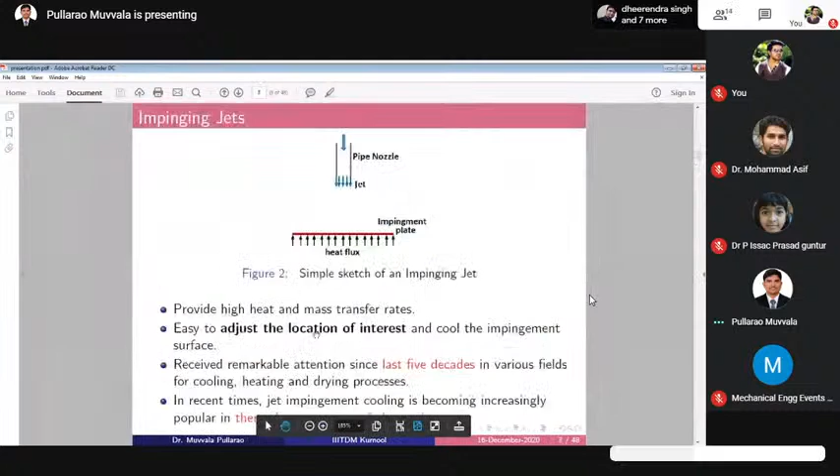I think this is the last session of this short-term training program. So the topic for today's session is impinging jets for thermal management. We'll discuss whether impinging jets can be used for a particular field or all the fields. Myself, Dr. Pullarao, I'm working as assistant professor at IIITDM Kurnool. Regarding the remaining details, Kondareddy sir might have already given you. So let us go to details about today's topic.

The presentation is oriented mainly towards my PhD topic. I have not chosen a different topic; whatever discussion I'm going to take part in here is entirely from my PhD study. The outline of the presentation is introduction, followed by review of literature, research outline, experimental details, and experimental studies conducted. My PhD study was entirely on experiments, so I'll take you through the experimental part details, how the experimental setup was built, and what different studies we conducted.

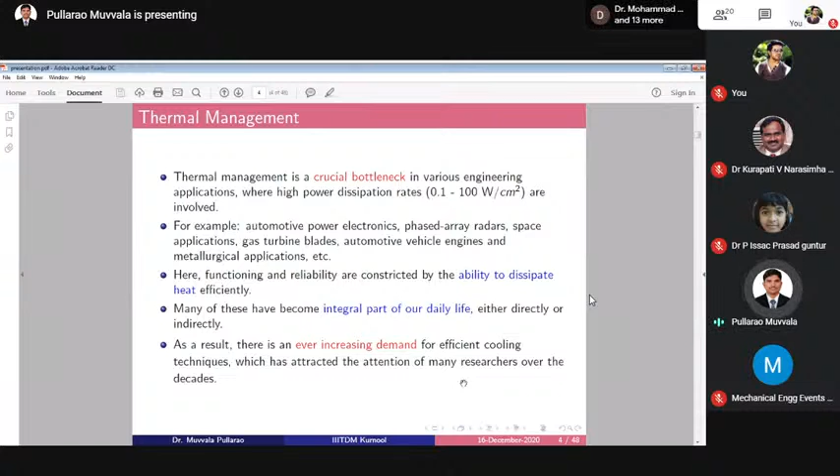If you come to different cooling techniques or thermal management techniques, thermal management is not confined only to cooling. Sometimes it can be for heating applications also. Let us confine our discussion to cooling techniques: active cooling and passive cooling. So what is meant by active cooling?

If you take a desktop computer, the CPU is there, and a fan will be present. The purpose of the fan is to cool the processor or other heat generating elements. So here the cooling is done by a fan, which has to run, meaning we supply some electricity for that. In active cooling technique, the cooling medium is supplied with the help of some external mechanism, for example a compressor, blower, or fan. These are required for supplying the working fluid to cool the hot object.

Some examples of active cooling technique: forced convection with air or liquid. In forced convection, air is sent with a fan or blower. Impinging air jet or liquid jet - this is what we are going to focus on now, impinging air jet, which also requires an external agency for sending the air. Other examples are spray cooling, thermoelectric cooling, and refrigeration systems. These are all active cooling techniques, where cooling is provided with the help of some external mechanism.

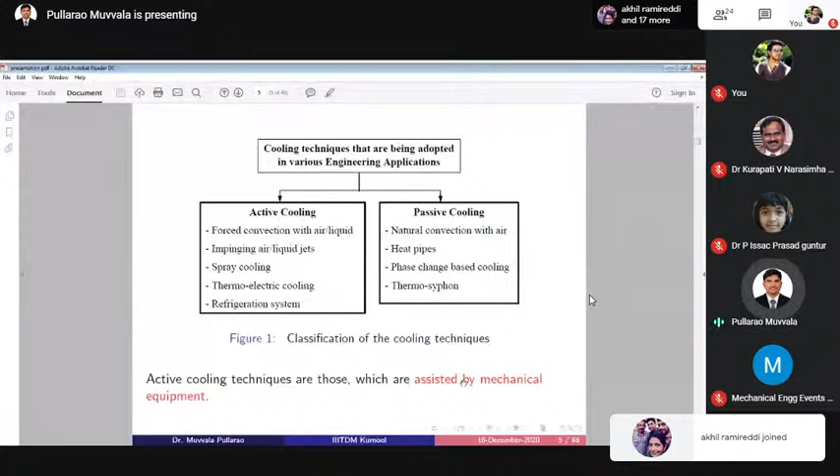If you see passive cooling: natural convection with air - here we will not supply any external power for running this device. Also heat pipe, phase change based cooling, thermosiphon. I think a few of these techniques were covered in the previous lectures, like phase change based cooling and heat pipes. So let us not go into much detail about that.

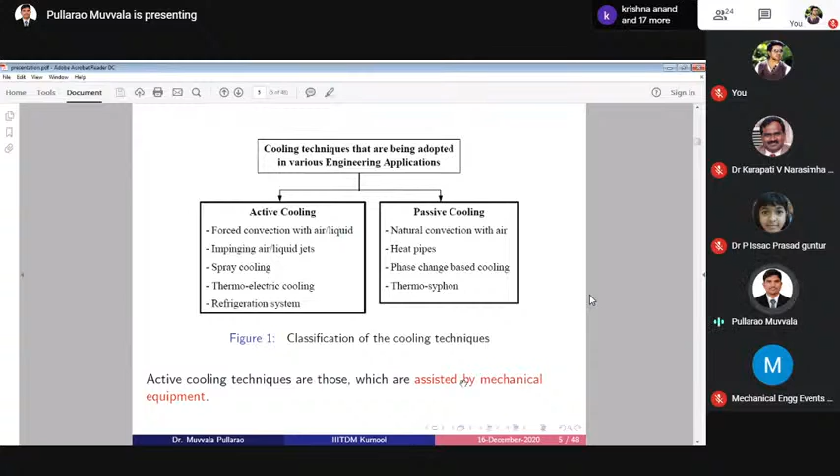Now I am focusing my attention towards impinging jet, and I am confining to only air jet, though jet can be a liquid jet also. Let us see what is meant by impinging jet: a jet is a stream of fluid issued from a nozzle with high velocity. In general, nozzle means a small cross section area. Whenever fluid is coming through a small cross section area, take the continuity equation, A1V1 equal to constant - if area becomes small, velocity will become higher. So by reducing the area, I am able to increase the velocity. That is the motto of a jet: a stream of fluid issued from a nozzle with high velocity.

Based on the relative direction of the jet with respect to the object of interest - so my jet will be there, I want to cool an object - how they are oriented with respect to each other matters.

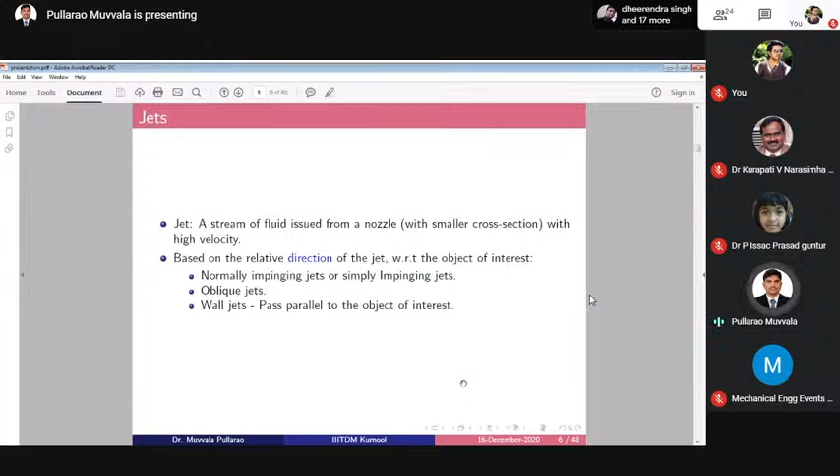We are classifying it as normally impinging jet or impinging jets - nothing but they are perpendicular to each other. Oblique jet: instead of having 90 degrees, some other angle, maybe 30 degrees or 50 degrees or 60 degrees. Wall jet means passing parallel to the object of interest, so both will be parallel to each other, with 0 degrees between them. So if it is 90 degrees, it is normal impinging jet. If it is parallel, it is called wall jet. If it is between 0 to 90, some other angle, it is called oblique jet.

So impinging jet, as I explained previously - just you see there is a red plate. That is the plate I want to cool. It is getting heated by supplying some heat flux. So there is a jet coming from the pipe nozzle. Nozzle, I told, jet will be coming out of the nozzle. Nozzle can be some orifice type nozzle or some pipe nozzle or some other nozzle - different types of nozzles are there. So I have taken the example of some pipe nozzle. Simple thing, just a small pipe is there, from that air is coming - that is a pipe nozzle.

So the jet is coming in vertical direction, and the impingement plate is in horizontal direction. You observe it is 90 degrees, therefore it is called impinging jet. So what are the features of it? This impinging jet provides high heat and mass transfer rates.

So this fact I am not just telling - previously so many researchers have identified and explored and listed this high heat and mass transfer rate, and easy adjustment of the location of interest to cool the impingement surface. For example, I am having an impingement plate, a bigger impingement plate, and my jet has a smaller cross section. The entire plate may not be subjected to the same temperature - a particular location may be at higher temperature, another location at lower temperature. So the advantage with this is I can orient my jet wherever the hot spots are.

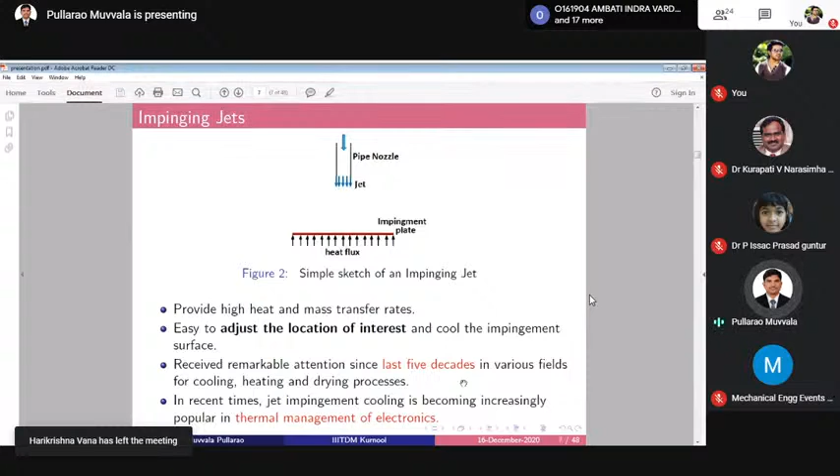There has been remarkable attention over the last 5 decades in various fields for cooling, heating and drying processes. So these jets are not only used for cooling purposes, they can be used for heating purposes and for some drying applications. One more point to keep in mind: over the last 5 decades, impinging jets are not a new field - the concept has been there for a long time. What we are doing nowadays is changing the application in which the impinging jet can be used. So this is not a new field, impinging jets are not new - we are just changing the application.

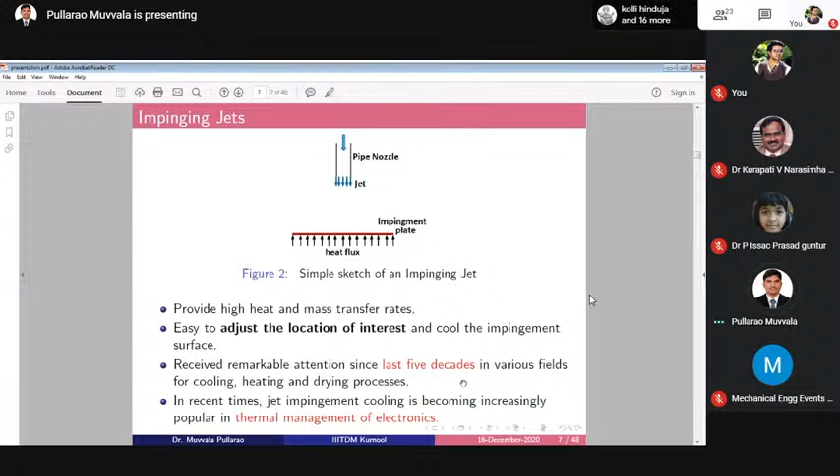In recent times, jet impingement cooling is becoming increasingly popular in thermal management of electronics. In the last 10-20 years, these impinging jets are widely used in thermal management of electronics. Earlier also it was used, but in different fields. So just observe the different fields in which these impinging jets are used - for cooling application, heating application, drying application - gas turbine blade cooling, electrical equipment cooling or electronic equipment cooling.

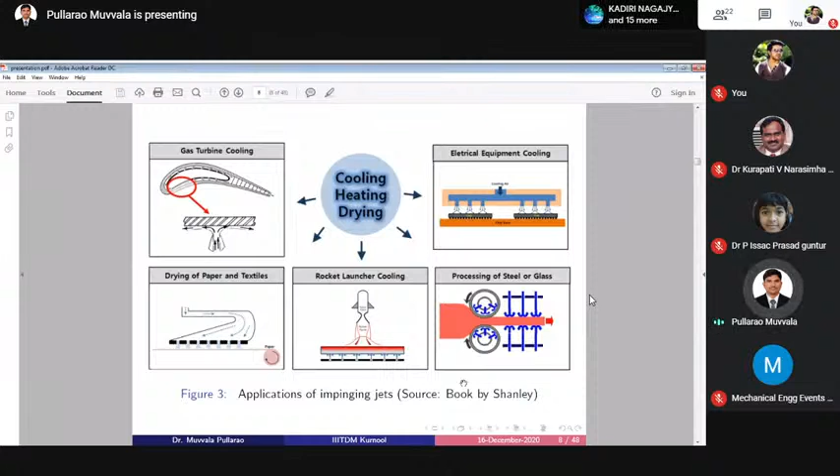So let us see the structure, the physics associated with these impinging jets, before going into its application part. I have taken a pipe nozzle having a diameter d. So the fluid comes out of the jet, comes out of the pipe with velocity v.

You see different regions demarked in the figure: free jet region, stagnation region, wall jet region. Pipe nozzle is there, there is an impingement surface. In the free jet region, the influence of this impingement plate is not seen, so therefore it is called free jet region.

So the jet traveling after a certain distance is going to hit the impingement plate. The region under the direct influence of the jet is called stagnation region. After hitting the plate in the stagnation region, the jet hits perpendicularly or normally. After hitting the surface, it moves parallel to the surface, then it becomes wall jet.

Once the fluid is flowing over the plate parallelly, boundary layer formation will occur, which we can see on the left hand side. So boundary layer growth will be there. That is the impinging jet physics: free jet region, stagnation region, wall jet region.

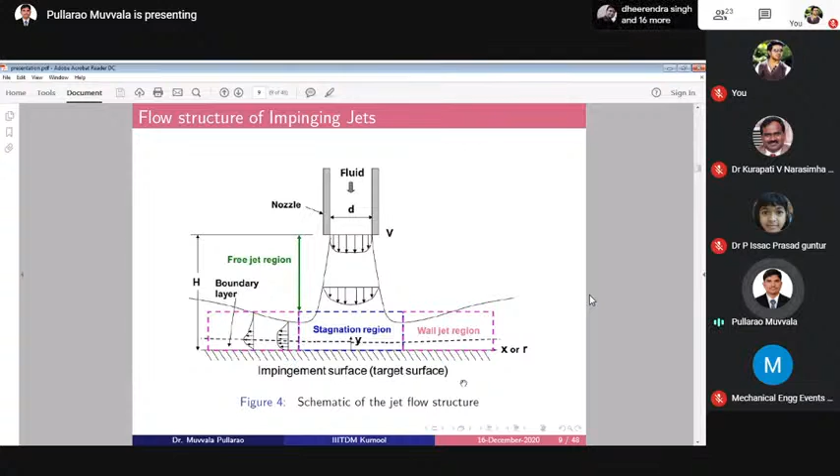Let us go into a little more detail about this free jet region, the flow region in the free jet region. The nozzle has a diameter of d or w. As the jet is moving longitudinally into the surrounding surface, if you observe, laterally its diameter is increasing.

So there is a lateral distribution as it is moving longitudinally; laterally also there will be some spread of the jet. Different regions are there: potential core region, developing zone, fully developed zone. You may have come across this in laminar flow through pipes, where also this type of region exists, though it's somewhat different.

But here, in this potential core region, there is a cone where the velocities are equal to the velocity at the nozzle exit. As you move away from the potential core region in the lateral direction, the velocities will be lesser than in the potential core region. Apart from that, as the jet moves forward,

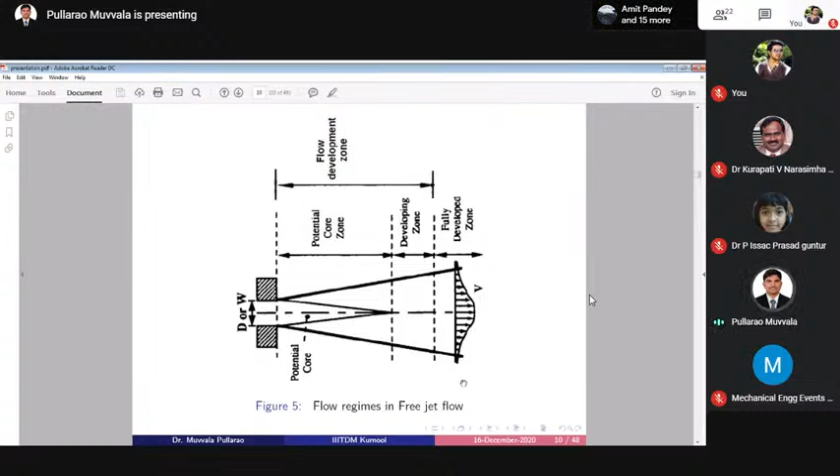the lateral spread of the jet is increasing, meaning the area of the jet spread in the lateral direction is increasing. So up to a certain distance, the potential core region exists. After that, a transition region called the developing zone occurs, followed by the fully developed zone. In the fully developed zone, the velocity profile is entirely different, but the profile remains the same as the jet moves in the forward direction.

Coming to the literature part, any research requires literature review; without it, you can't become a good researcher. The purpose of doing a literature review is, first, to know what people have already done. If people have already done it, what is the need to do the same thing again, to reinvent the wheel? So the motto of doing literature review is first to understand what previous researchers have already done, and second, how they have achieved a few things.

For example, some people might have done computational studies, some analytical studies, some experimental studies. We can understand how a problem can be tackled and what different methodologies can be adopted.

Next, we have to find some gaps. Everybody cannot do everything, so there will be some gaps, and we have to identify those gaps. Based on a thorough literature review, we identify the gaps and accordingly plan our research topic. That is why a thorough review of literature is important.

So let us see some literature. The papers I am going to explain are not the only ones I have read. There are hundreds of papers we have gone through as part of PhD work, but I am only providing you a few papers.

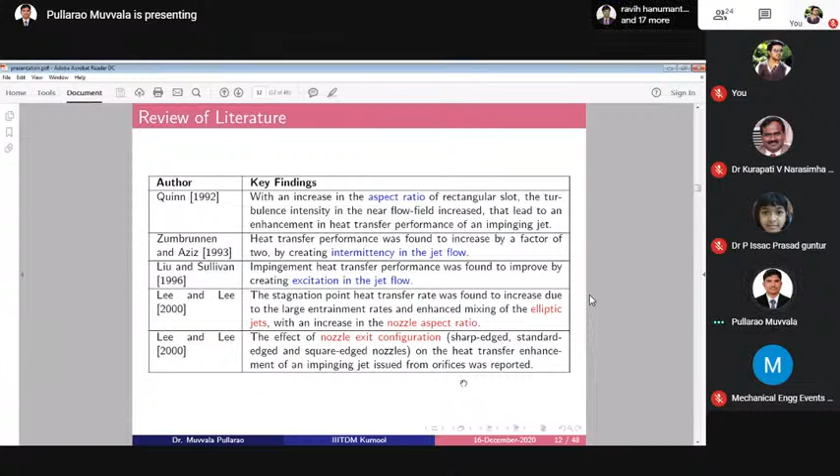Again, Lee et al. in 2004 varied the nozzle diameter and observed how the heat transfer performance was affected.

Next, confined and unconfined jets. Depending upon the type of jet, we can have a confined jet or an unconfined jet. That is one variation of the type of jets.

Another thing is unsteadiness in the jet flow. Instead of having a steady flow, it is like having a triangular profile, rectangular profile, or a wavy kind of profile. By creating unsteadiness in the jet flow, studies were conducted and heat transfer performance was observed to improve.

In 2010, studies were conducted by varying the inlet geometry and aspect ratio. Inlet geometry means whether it is a rectangular jet, square jet, circular jet, or elliptical jet. These studies were conducted to observe which one performs better.

The next study involved piezoelectrically driven synthetic jets compared with steady jets. So different variations of jets were used, and the list goes on.

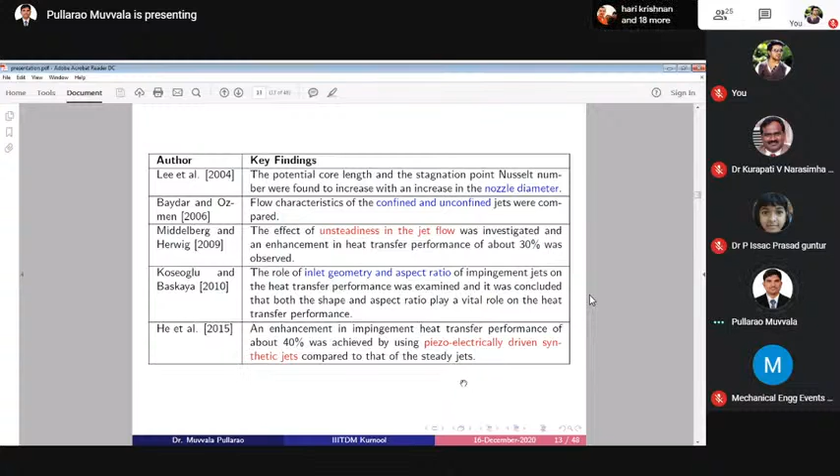Various flow control techniques have been employed, such as creating excitation in the flow, creating unsteadiness in the flow, varying the shape of the nozzle, or changing the flow pattern. These are examples of flow control, and heat transfer studies were conducted using them.

In some studies, heat transfer performance was reduced; in some studies, it was improved. Whichever gave better performance, researchers focused more on that heat transfer enhancement phenomena. Keep in mind that research should not always give positive results. Sometimes negative results are given too. You anticipate that heat transfer enhancement will be there, but you might get heat transfer reduction instead. That is also research.

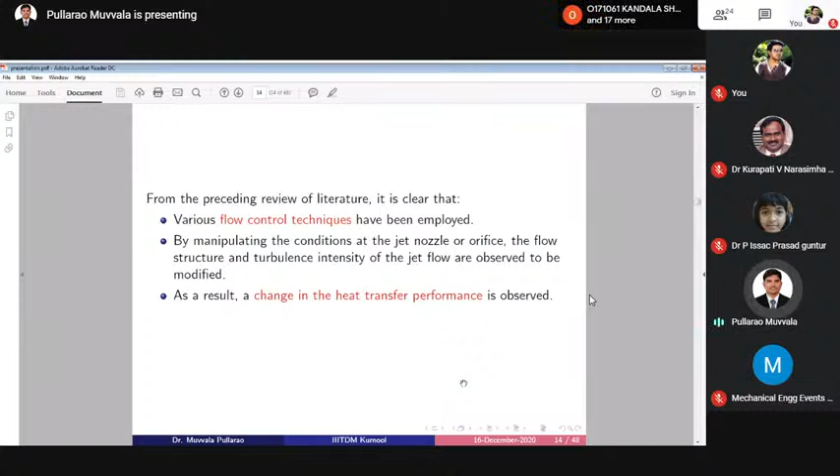You should not only report positive outcomes. It is not like you should always tell advantages; there are situations where you should tell disadvantages also. Some studies gave heat transfer enhancement, some gave poor heat transfer. Those heat transfer enhancement aspects will be discussed further.

Apart from that, another set of studies used perforated plates instead of a normal nozzle. Instead of a plain nozzle, they used a perforation kind of arrangement, like a sieve with many holes. Such types of nozzles were used.

Another approach is delta tabs at the nozzle exit. Instead of a plain or circular nozzle, tabs were placed to create disturbances at the nozzle exit. Additionally, twisted tapes were inserted inside the nozzle.

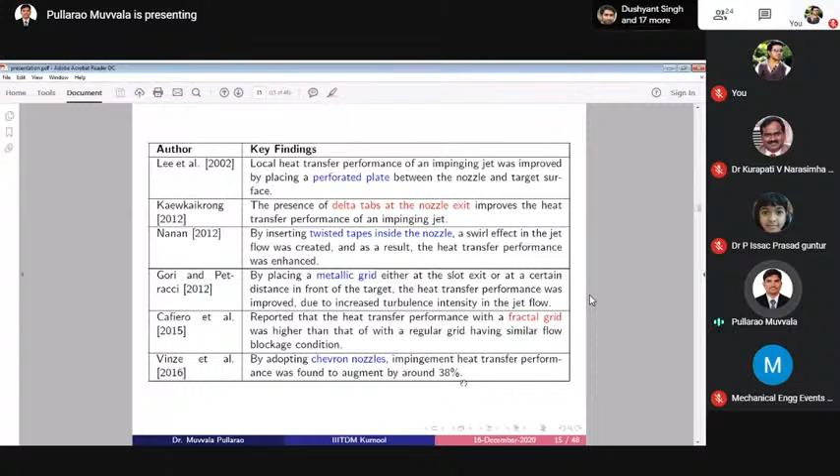Gori and Petracci used a metallic grid. In 2015, some studies used a fractal grid, and in 2016, a chevron nozzle was used. So for a fixed shape, for example circular, by creating some obstruction in the flow using a perforation plate, various modifications were studied.

So many studies have been conducted to enhance heat transfer performance by adopting flow blockage techniques such as installing wire screen, grid, fractal grid, etc. within the nozzle, creating flow disturbance or blockage. They might have used meshes, fractal grids, or delta tabs. By adopting these different flow blockage techniques, studies observed the heat transfer performance.

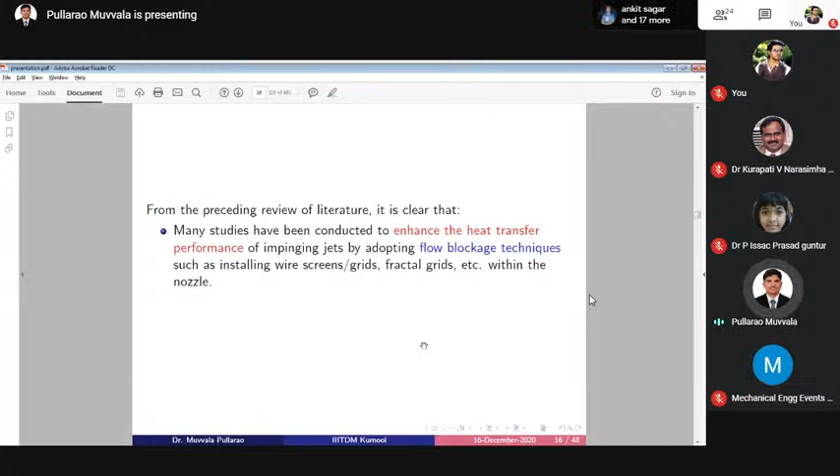So apart from that, till now we discussed how changing the flow control means varying the profile of the nozzle. Another thing is flow blockage. In flow blockage, if I block the flow, how was the performance there.

Apart from that, we have concentrated at the jet side. So what about the impingement side? If we create some disturbance at the impingement side, what will happen?

In the year 1992, a study was conducted using millimeter scale fins on the impingement surface. There is an impingement surface and a nozzle. Till now we discussed the nozzle; now consider the impingement surface, where millimeter scale fins, not large scale fins, are used. They observed whether heat transfer performance improves, and it was observed to improve.

Again, some roughness on the impingement surface. If we create roughness on the surface, what will happen? Next, microstructure surface, not milliscale. Then, nanostructured surfaces.

In 1993, six different types of modified surfaces were used. Next, in 2002, Ekkad and Kontrovitz studied dimpled surfaces. So by varying the profile of the impingement surface, adopting fins, microstructures, nanostructures, roughness, or dimples, what happens to the heat transfer performance?

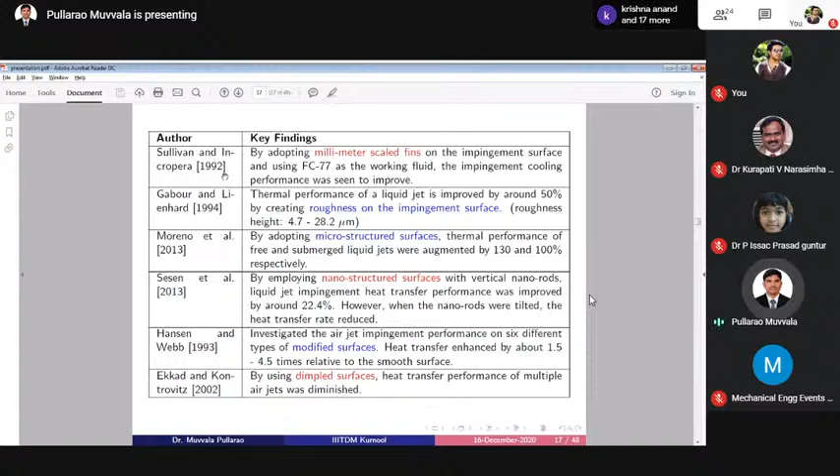So many studies have revealed that impingement heat transfer can be altered. It could be increased or decreased by adopting modified surfaces.

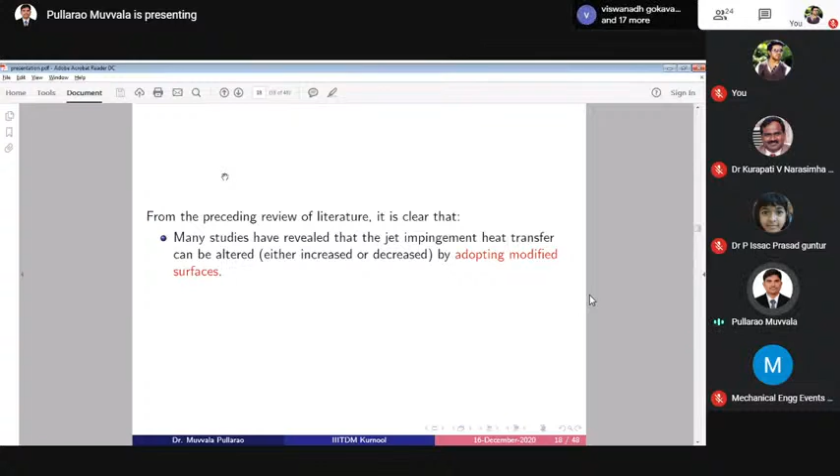With this background, I have formulated my research topic. The common feature is flow disturbance. If I create flow disturbance at the nozzle side or orifice side, or at the impingement side, I adopted rough surfaces and microfinned surfaces at the impingement side, and a distributed orifice fitted with wire mesh.

So what is a distributed orifice? We will see later. What is meant by wire mesh? We will see that later too. Finally, I compared these things: by creating flow disturbance at the orifice side or at the impingement side, how the heat transfer performance will be affected.

My focus is mainly towards enhancement in heat transfer. After conducting all these studies, we will list in which case heat transfer enhancement occurs and in which case heat transfer reduction occurs. We have to list out all those things, whichever is required. My motto is heat transfer enhancement, so we have to focus on those enhancement studies only.

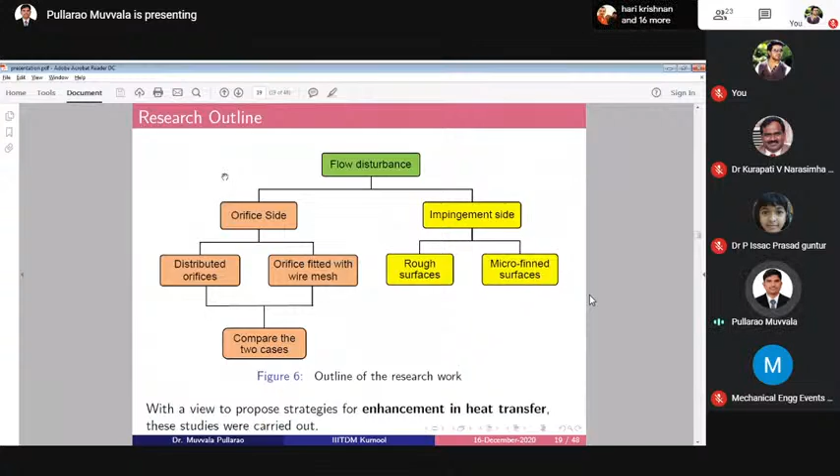So here I am using air, and the air has to flow. For that purpose, I should have some external mechanism — that is the air compressor used here.

For that, the second part is the filter regulator unit. For example, the surrounding air we take may have some dust and some water vapor that will condense.

Those things will be removed with the help of the filter regulator unit. Next comes the dehumidifier. If the filter regulator unit almost removes the water vapor, if any little bit of traces are left out, those will be removed with the help of the dehumidifier.

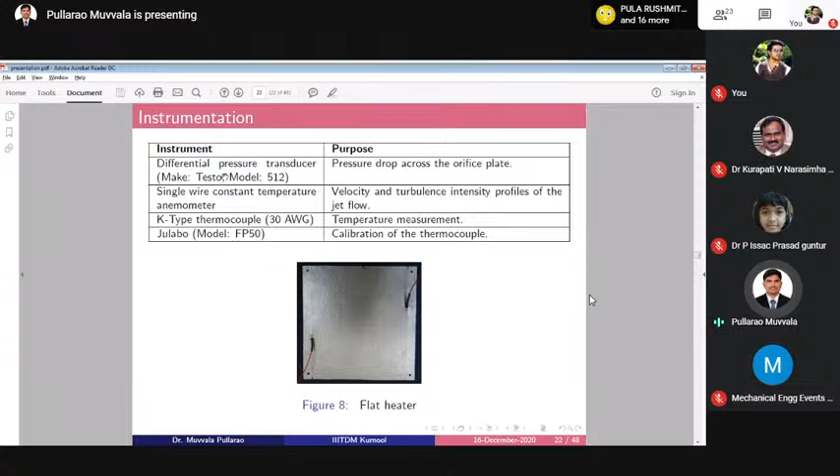Since we are conducting heat transfer studies, temperature has to be estimated. That is measured with a K-type thermocouple. Thermocouples come in 2 wires, which we join together to form a junction. After forming the junction, we should check how it is performing.

Any instrument we have to calibrate. Calibration is a must for any instrument. Calibration means checking with respect to a standard value. So for the thermocouples fabricated in the laboratory, we have to check whether they are giving correct readings or not.

For that purpose, a constant temperature bath is used, made by Julabo. That is used to calibrate the thermocouple.

The bottom one is a flat heater. The impingement plate will be heated by supplying some power through this flat heater. Inside it, there is a mica sheet with nichrome wire wound around it.

The two wires coming out are the plus and minus wires, connected to the power supply. Inside, the nichrome wire is there. By switching on the power supply, current flows through the nichrome wire, which gets heated. The heat passes through the mica sheet and is given to the impingement plate.

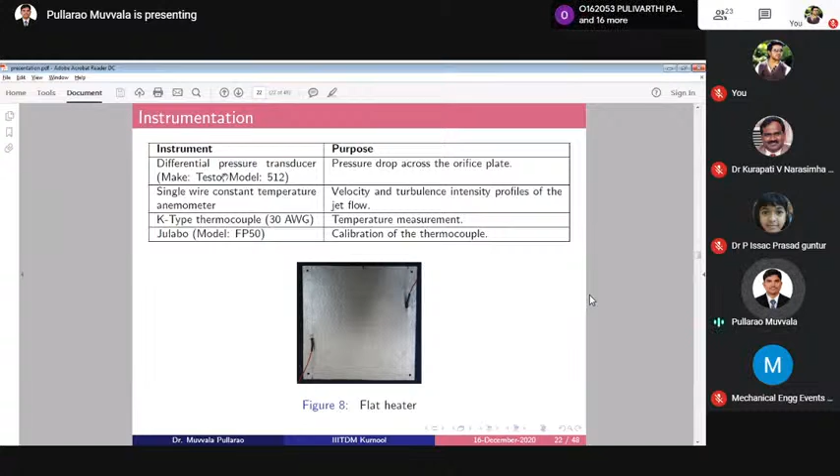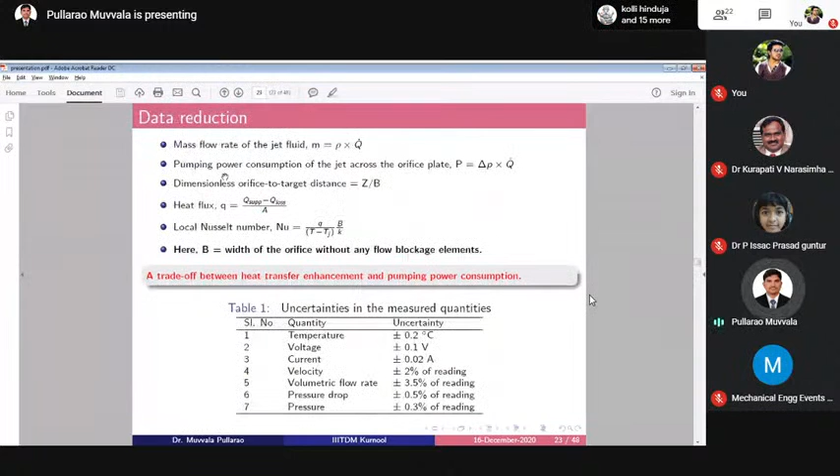Apart from this, what are the derived quantities? For example, heat transfer or Nusselt number. Those things are also prone to errors, those are derived quantity errors, so those things also we have to estimate. So now, validation of the experimental setup.

People may think only CFD studies should be validated. It is not correct. Even sometimes experimental setups also need to be validated. Since this is a setup built by me newly, I don't know how far I've constructed my setup properly. For that purpose, I should check whether my experimental setup is correct or not.

For that purpose, I have to check my experiments, compare the results with previously published results, and observe whether they are matching or not. If they are not matching, I should ensure that something is a mistake with respect to my fabrication. I have to introspect and plan my setup accordingly.

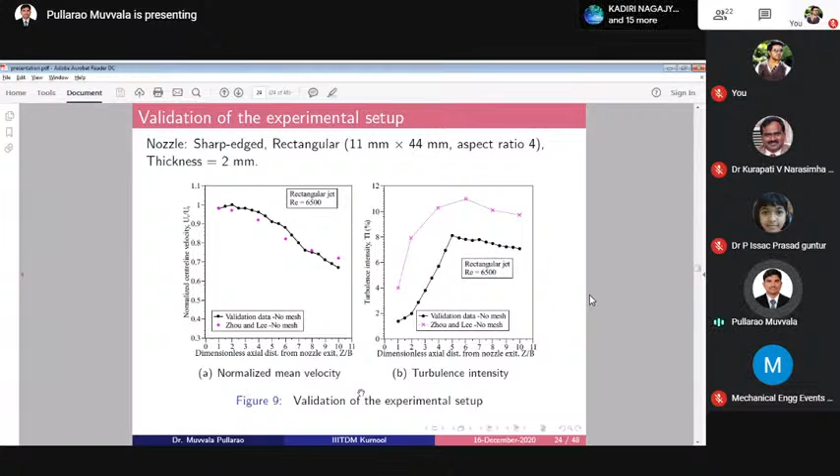So then I have started my experimental studies. I have conducted different types of studies. Let me start with study number 1.

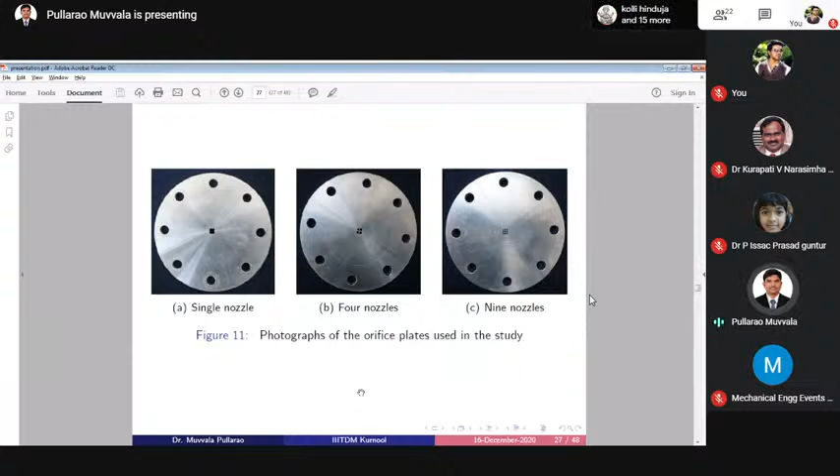We can even go for 4, 9, 16 orifices also. But the problem is one orifice width is 1 mm; going below that, fabrication becomes difficult. For computational studies we can go for maybe 0.5 mm also, but when doing experiments, there are so many complications with fabrication. Even for making a 1 mm square hole, we have to go for EDM techniques; if I go even below 0.5 mm, again we need sophisticated fabrication techniques. That's why I have confined it to only up to 1 mm.

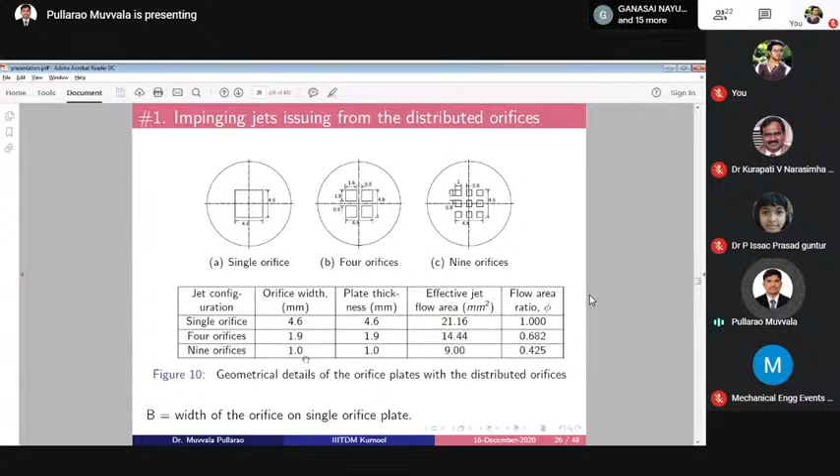So as part of this distributed orifice study, in study 1, we have a fixed mass flow rate condition. Whatever fluid flow I am sending, whether it is single orifice, 4 orifice, or 9 orifice, it is fixed. Then I observed what is happening to the velocity.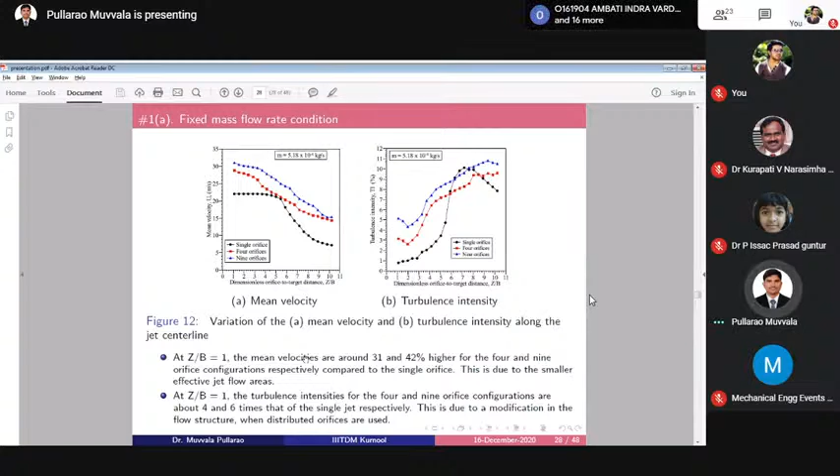Again, regarding how turbulent intensity is increased: earlier with a single orifice, the flow had to go through 1 passage. Now it has to go through 9 passages, so the flow has to distribute in 9 directions. Obviously there will be disturbance in the flow, and when disturbance is there, turbulent intensity will be increased. So these are the phenomena happening behind it: velocity is increasing, turbulent intensity is increasing.

So these are the advantages: velocity increases, turbulent intensity increases. Okay, good. But what happened to the pressure drop across the orifice plate?

I have put an orifice plate. If I take the single orifice scenario, what is the pressure drop across it? For multiple orifice, what is the pressure drop? Let us see the last one, 7.4 scenario: pressure drop is 41.5, 119.4, 226 Pascal. You see, it is almost 5 times — 41 and 226 is almost 5 times. Pressure drop has increased 5 times.

Correspondingly, the pumping power is also calculated. It is 26.4 into 10 power minus 3, that means 0.0264, and on the higher side it is 0.143 watt. So 0.143 watt is a very small value. Even though percentage-wise it may be 5 times higher, magnitude-wise it is very small. So whatever the pumping power consumption increase is, the value is only slightly more. So this can be okay, we can leave it.

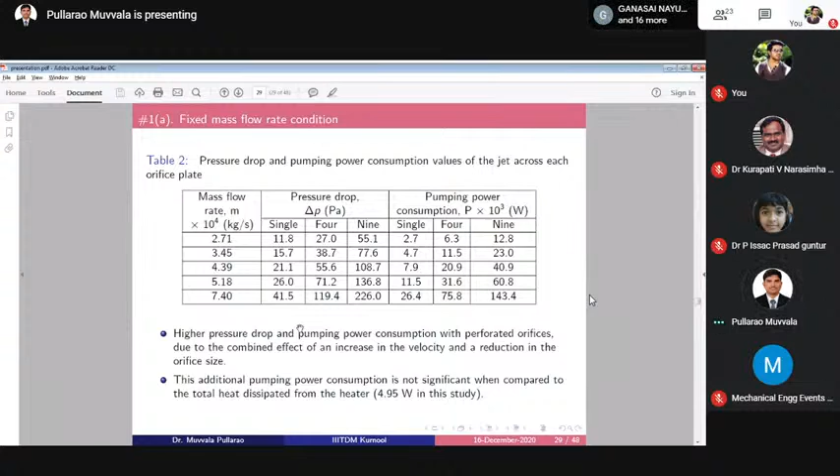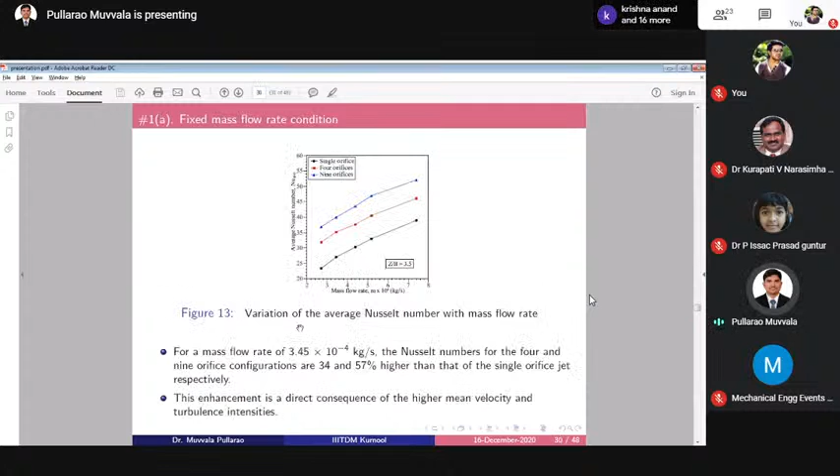What is the reason? We have already observed: mean velocity is increased, turbulent intensity is increasing. Whenever we report that heat transfer performance is improved, we should justify the reason. To justify that, we conducted fluid flow studies and turbulent intensity studies, and concluded that because of these reasons, heat transfer is increased. So because of adopting these multiple orifices, heat transfer performance is increased, while the pumping power consumption increase is limited and can be neglected.

Apart from that, that is one type of study in case one. Another study is with the same distributed orifices, but I want to fix my Nusselt number on the target plate. I have fixed the heat supply to the target plate and fixed my Nusselt number.

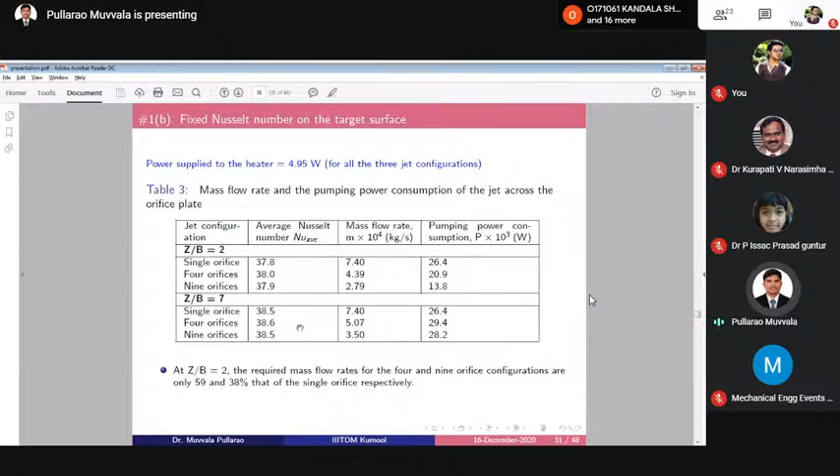For example, let us see Z by B equal to 7. Single orifice: my average Nusselt number is 38.5, 38.6, 38.5. To achieve the same Nusselt number, what fluid flow rate is required? For single orifice, the fluid flow required is 7.4 into 10 power minus 4 kg per second. For 9 orifice, it is 3.5 into 10 power minus 4 kg per second. So the amount of air required becomes 50% or 40% only.

Since it is air, it is freely available. But if I am using some other fluid, I should have extra fluid available. Apart from that, here I am also using a compressor, so I should use double — for example, comparing 3.5 and 7.4, with single orifice I have to handle double the amount of air flow rate. Then the power consumption of the compressor will also increase, and I should use larger capacity compressors. So these things also need to be considered.

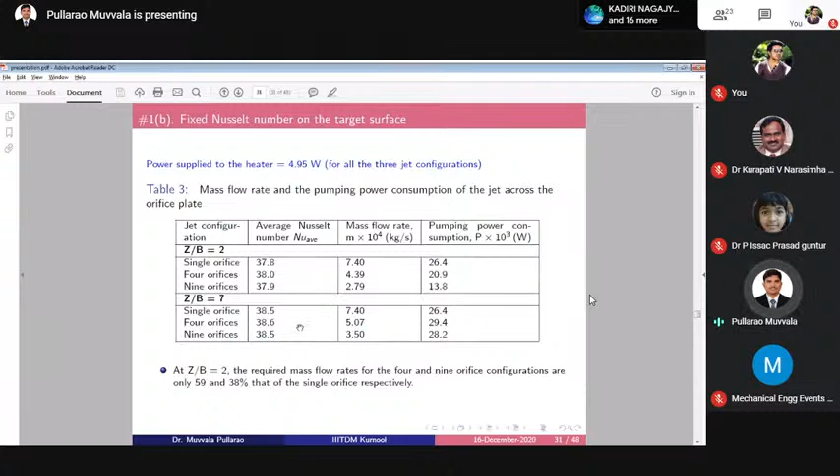If I take the 9 orifice scenario, with multiple orifices, the amount of fluid required is reduced, and the compressor size also gets reduced. This is also an advantage. So from these two studies we can conclude that if I fix the mass flow rate, Nusselt number can be increased, and if I fix the Nusselt number, the amount of fluid required will be reduced. These two are favorable scenarios for me.

So another scenario, impinging jets with nozzle having wire mesh at the exit. Just see the left hand side figure. If I place this type of orifice plate, the red portion is the wire mesh.

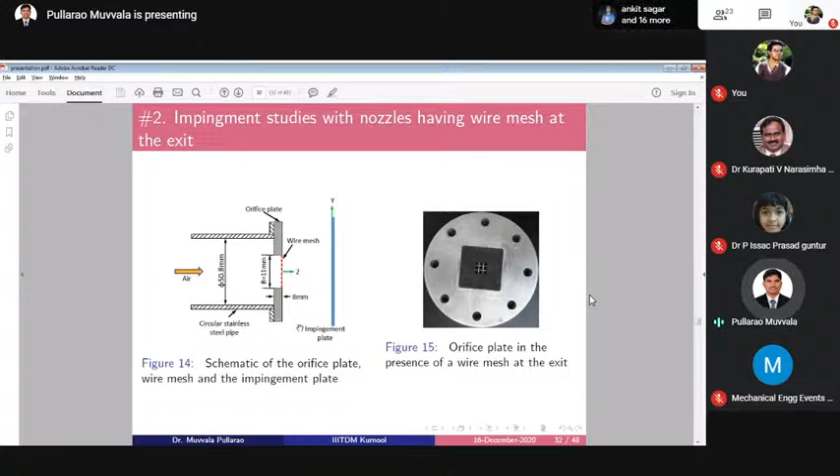Instead of having a plain simple nozzle, we are putting some wire screen meshes, just like mosquito or window meshes. Three different varieties of meshes were taken. If you observe, I have put some steel rule between mesh 11 and 13, you can see different numbers of wires are there. So the number of wires will vary, and the gap between two adjacent wires will also vary. These are the normally available wire meshes.

So again, we have measured the area based porosity. I have used 3 different types of wire mesh and one case without mesh, measured the area based porosity value, and conducted the studies.

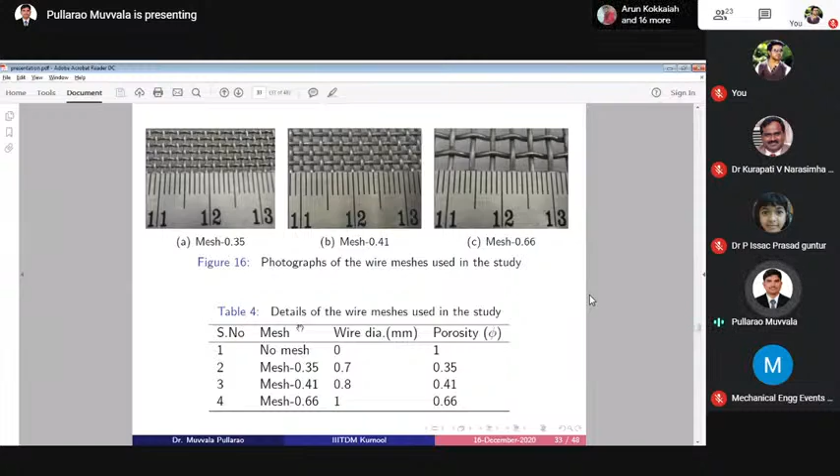So when the area porosity value is reduced, that means area is reduced for the jet flow. As a result, velocity increases, and turbulent intensity also increases. So these are the background phenomena - mean velocity is increasing, turbulent intensity is increasing.

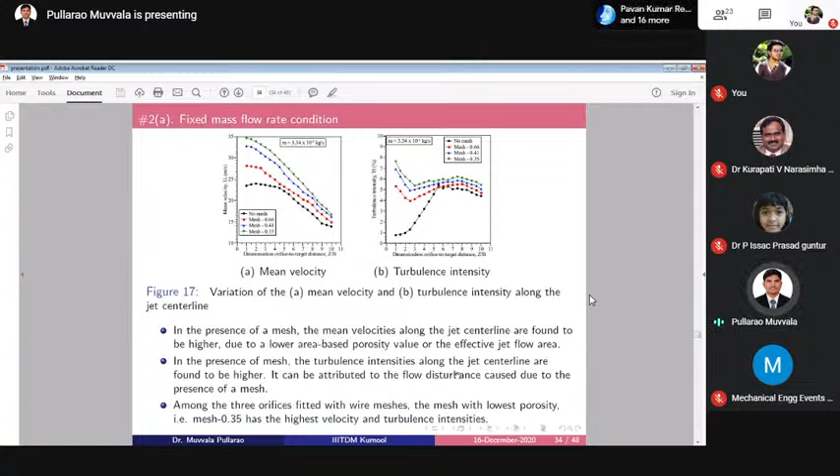Coming to pressure drop and power consumption, just see 4.82 into 10 power minus 3 scenario, 242, that is without mesh. With mesh 0.66, 431, 631, 784 - 242 and 784, almost 3 times it is there. Correspondingly the power consumption is 1.010, 3.274, around 2.274.

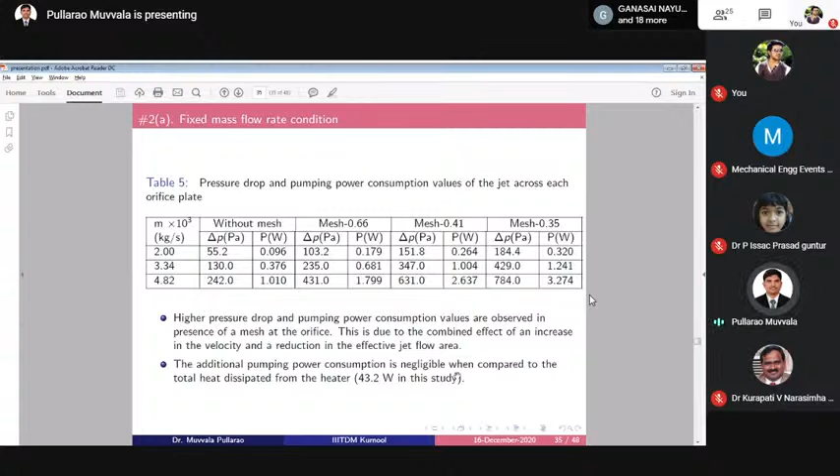In this study, the heat I am supplying is 43.2 watt. The power consumption with respect to this mesh is 1.01, 3.2, the difference is close to 2.2. 2.2 and 43.2 comes to around 5%, so some significant value is there. We should introspect this aspect. Previously the magnitude was very small so we did not concentrate much on power consumption, but here it is close to 5%, so we should introspect what is happening here. That phenomena we will see later.

So instead of presenting the result in a monotonic way, like whenever we present a paper, we should present the same result differently. Previously I told how I am comparing without mesh, single, and perforated. Now what I am taking is the ratio of with mesh divided by without mesh. Here I have drawn a horizontal line at 1. If you see the figure, all are above 1, meaning because of the mesh, the heat transfer performance is improved.

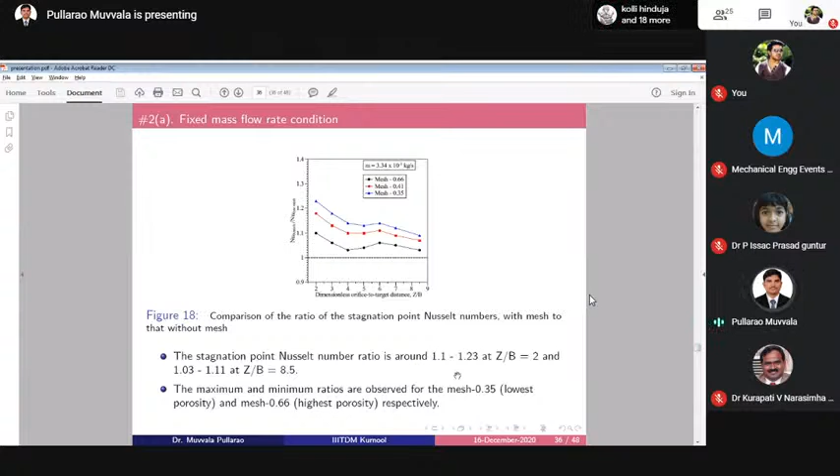That is how I presented the result differently compared to the previous scenario, with all values above 1. That blue one is mesh 0.35 - it has higher performance because it has higher velocity and turbulent intensity.

Coming to what I told about power consumption, that is a significant value - let us focus on power consumption and keep studies on that. So I have fixed the pumping power consumption at 0.376, or let's take 1.010. I want to maintain the pumping power across the orifice plate the same. Correspondingly, what is the required mass flow rate and what is the pressure drop? For the case of no mesh, it is 4.82 into 10 power minus 3. For the case of mesh 0.35, it is 3.10 into 10 power minus 3. So the mass flow rate is reduced.

So the amount of mass that is flowing is reduced. You see mean velocity and turbulent intensity values. The black portion is without mesh, and the remaining colors are with mesh.

If you observe at lower Z by B values, mean velocity is higher for mesh. But as you move away from the nozzle, Z by B value is increasing, and the part without mesh is having higher mean velocity. Even with respect to turbulent intensity, at lower Z by B values only, meshes are having higher turbulent intensities. At higher Z by B values, meshes are not having higher turbulent intensity.

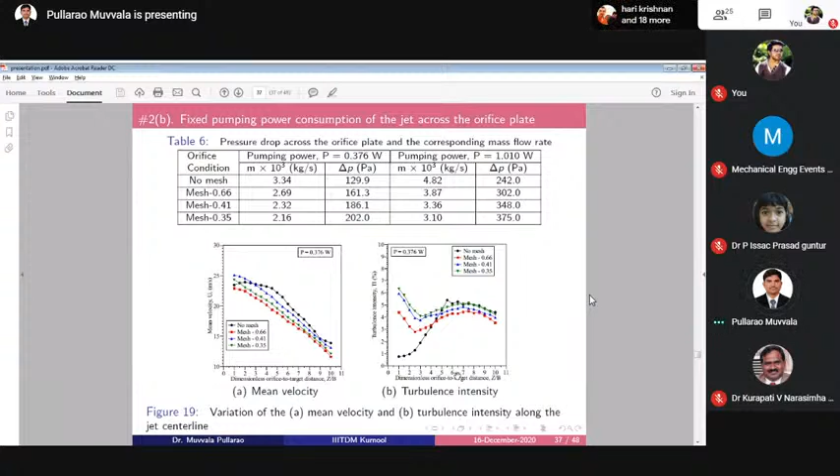So with this, what is the heat transfer performance? At lower Z by B values, we can see enhancement is more than 1. But at higher Z by B values, there is a reduction in heat transfer. So we should not go for such type of studies. Whenever our constraint is fixed pumping power consumption, I should use lower Z by B values only. If I go for higher Z by B values, it is not advantageous. That is what we have to conclude.

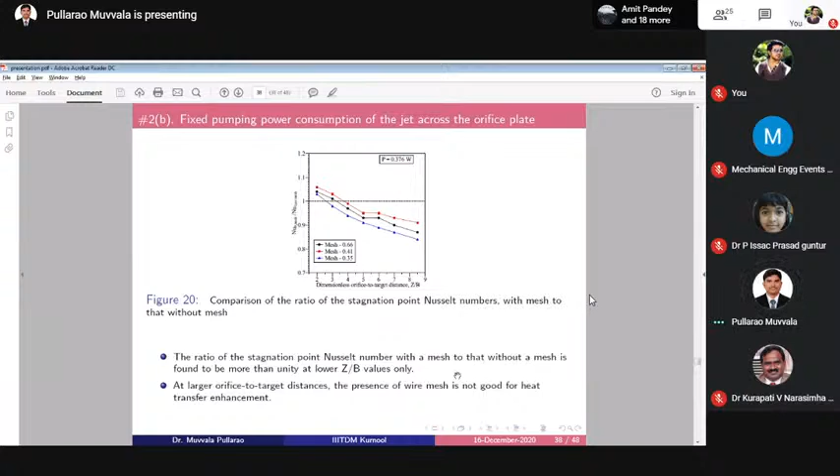So, effect of orifice blockage element on the performance. What are the studies previously we conducted: without any disturbance, with distributed orifice, with mesh. So these three we have taken and compared.

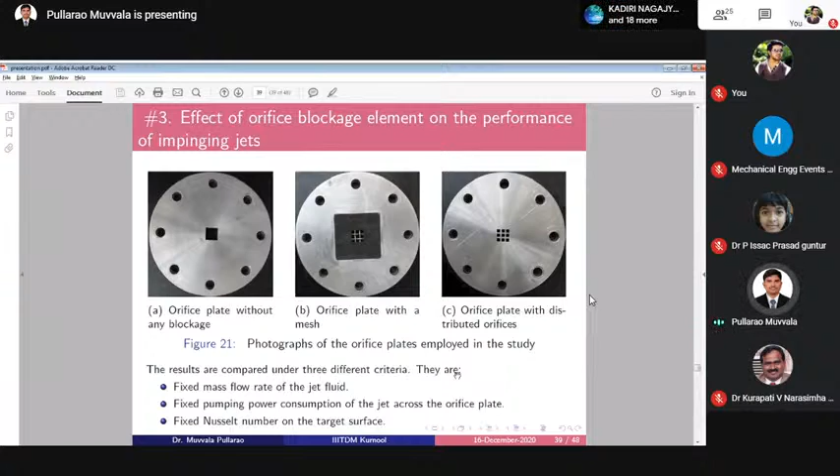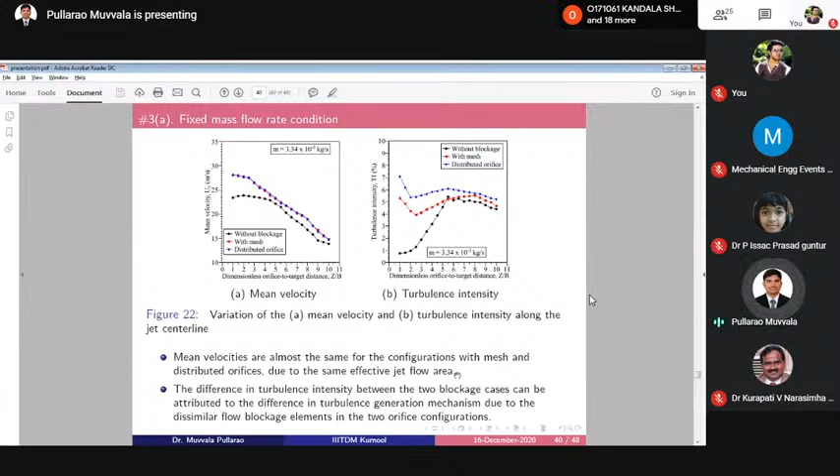By 3 different parameters: by fixing the mass flow rate, by fixing the pumping power consumption, or by fixing the Nusselt number. So by fixing the mass flow rate, the black one is without blockage or any disturbance, red one is with mesh, blue one is with the distributed orifice. You see velocity is more or less same, but turbulent intensity is higher for the distributed orifice.

So accordingly, come to figure 23, heat transfer performance is higher for the blue thing, that is the distributed orifice, because turbulent intensity is higher for this. That is the reason.

Another thing, when you see the pressure drop and pumping power consumption, without blockage it is 242, with blockage it is 431 and 491. So obviously with blockage pressure drop is higher, but when you compare mesh and distributed orifice, the pressure drop variation is little, some 10%, but heat transfer enhancement is more.

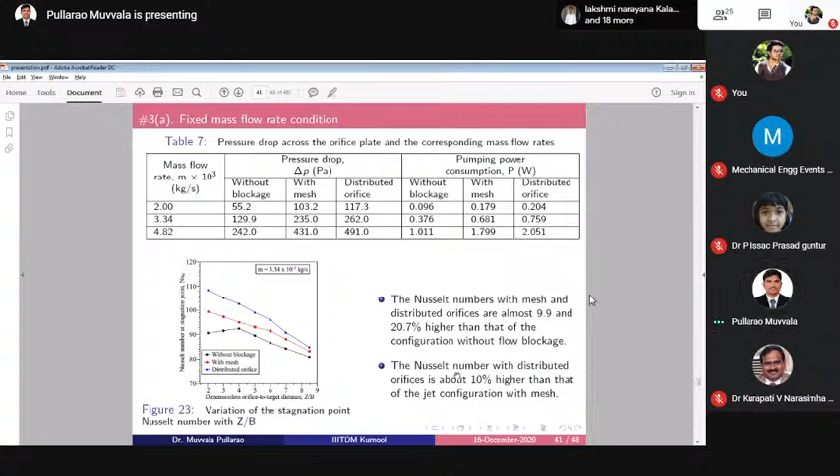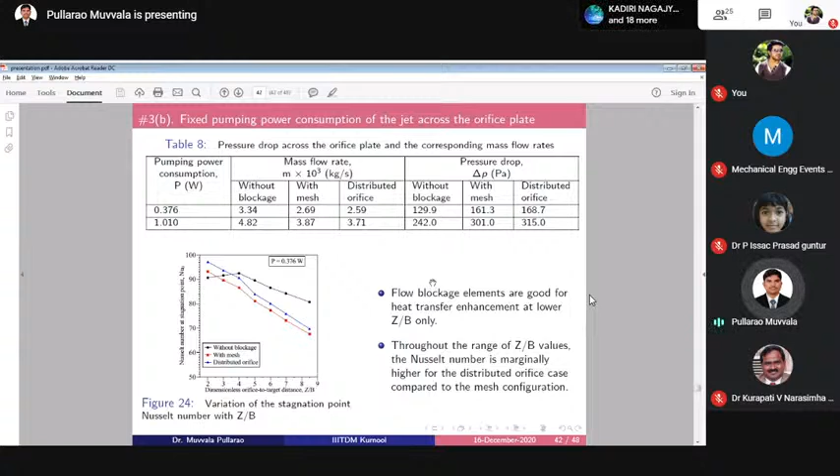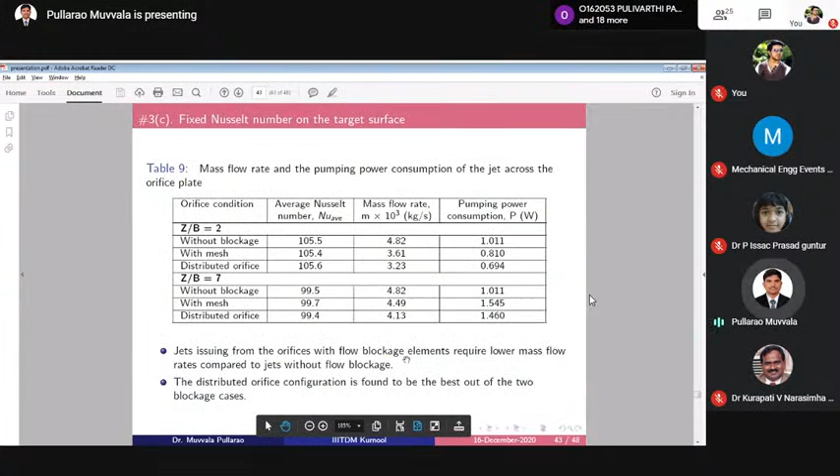Again by fixing the Nusselt number, we have conducted the studies. At Z by B equal to 2, without blockage the flow rate required is 4.82 into 10 power minus 3. With mesh it is 3.61 into 10 power minus 3. With distributed orifice it is 3.23 into 10 power minus 3. So because of adopting flow blockage techniques, if I want to keep fixed Nusselt number, the amount of airflow required is reduced. As a result, my compressor size also reduces. It is an advantage for me.

So throughout all these three studies we observed: flow blockage techniques in some cases are outperforming the without-blockage techniques. And when we compare mesh and distributed orifice, the distributed orifice performance is better than the mesh scenario. The physics associated with that is also described.

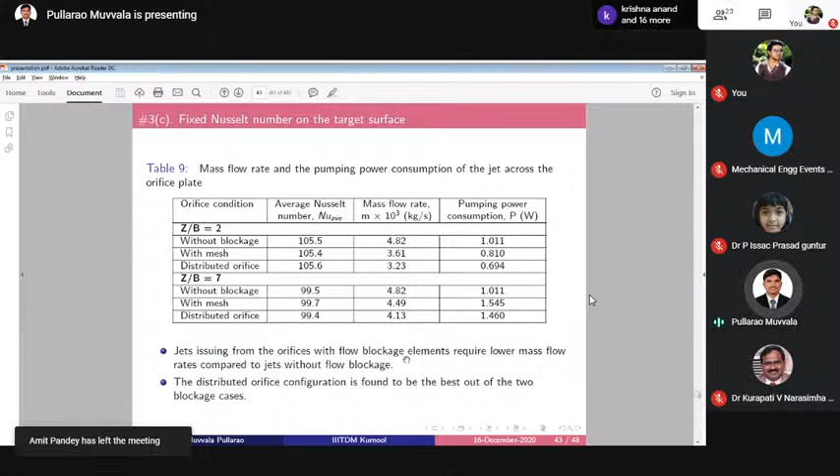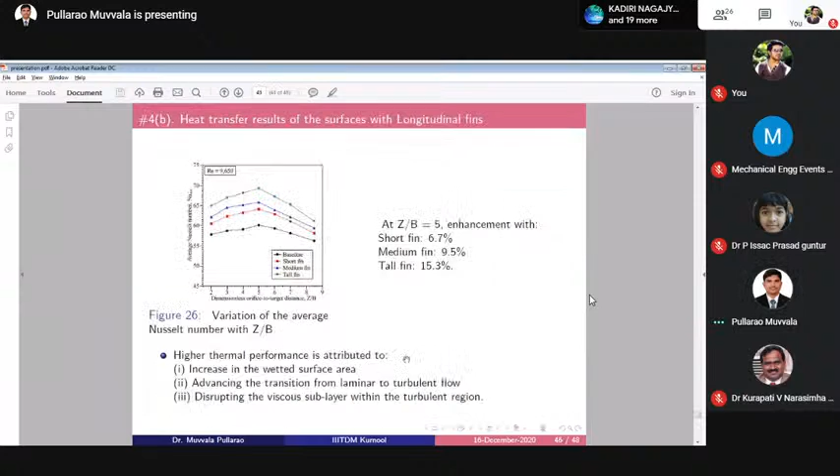Again, fins are there, so whenever fluid is flowing over the passage, the fins create a disturbance. Flow break will occur, so laminar flow becomes turbulent, and the viscous sublayer is broken. So there are wide varieties of reasons - whether it is because of increase in area, or breaking of the laminar sublayer, or early progression to the turbulent region. There are different reasons for this improvement in heat transfer.

So one conclusion is that longitudinal fins are good for heat transfer enhancement with respect to jet impingement. To conclude whether area alone is the reason, another set of studies was conducted.

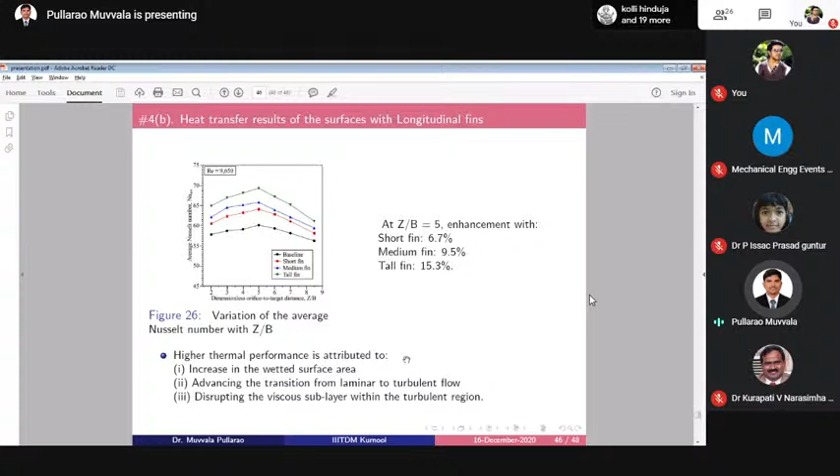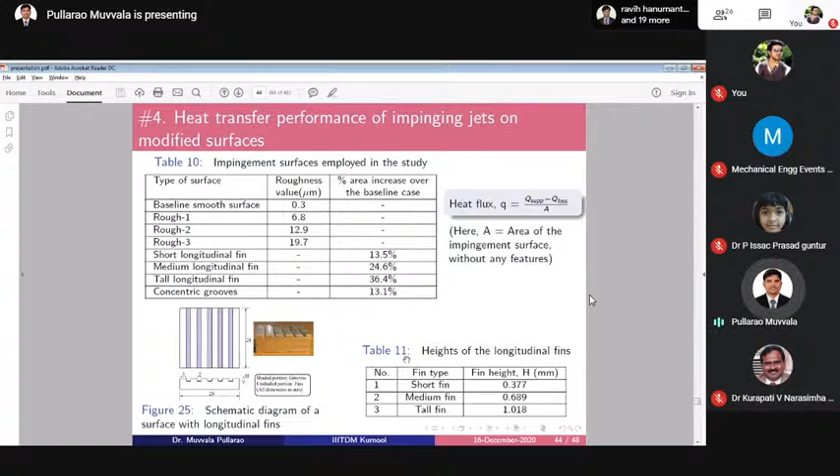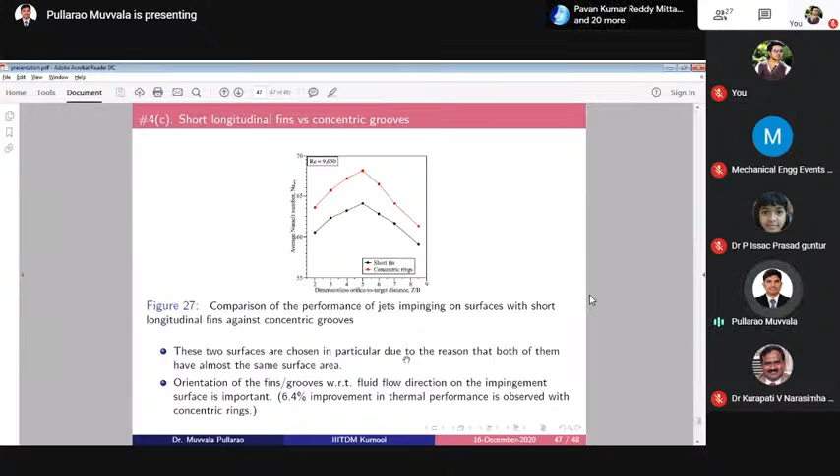This gives some ignition for further research - if I change the profile of the impingement surface, here I have used longitudinal fins and concentric rings, but somebody can adopt different varieties of fins to see how performance varies. This opens up further studies, showing that the orientation and profile of fins on the surface makes a difference with respect to heat transfer enhancement.

So that is what I presented as part of my study. Now the floor is open for questions. Participants, any questions?

Sir, can we increase the number of orifices, or is the optimized value 9? No, I told you what the 9 orifices I used have - it is a 1 mm hole size, and getting 1 mm hole size in a square shape is very difficult with normal manufacturing processes. We have to think about the fabrication process too. For getting a 1 mm hole, it became very difficult - we had to go for sophisticated techniques like EDM. If you want to go for 0.5 mm, fabrication becomes even more difficult.

So you can conduct some CFD studies and go for different varieties of sizes. Okay sir, thank you sir.

Any more questions? Hello sir, yeah, hello. So why did you prefer square profile only? Why not circular profile?